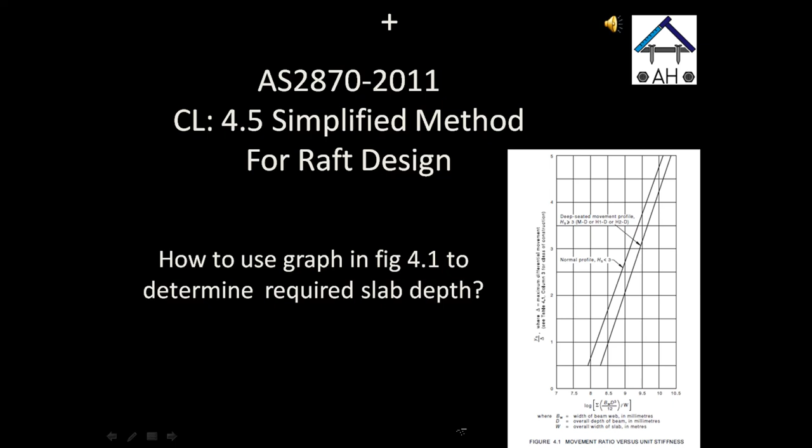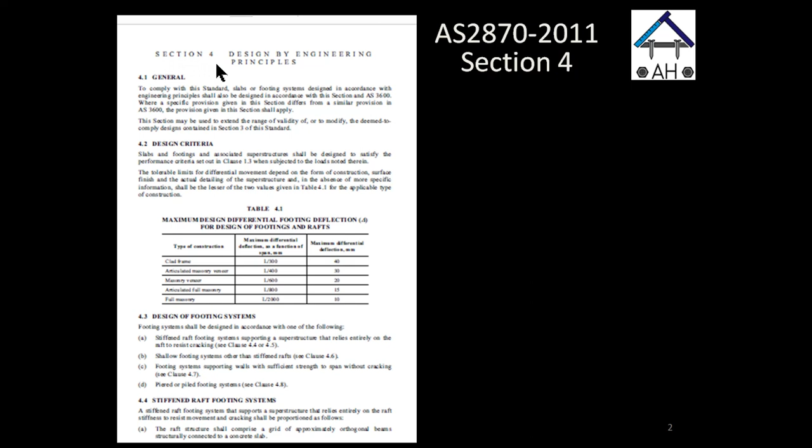The simplified method is located under section 4 of the standard, design by engineering principles. This section primarily allows the designer to work outside of the scope and modify the deemed to comply designs contained in section 3. So the designer can go out and modify the rib spacings or beam spacings, but as long as it takes the same shape of slabs which are covered in the deemed to comply designs.

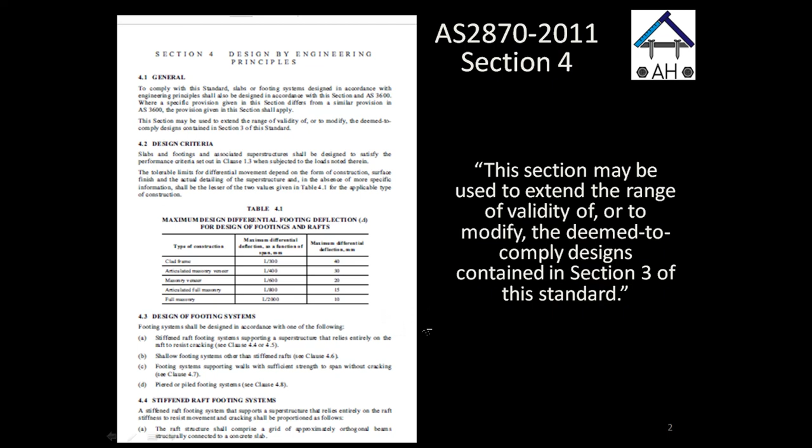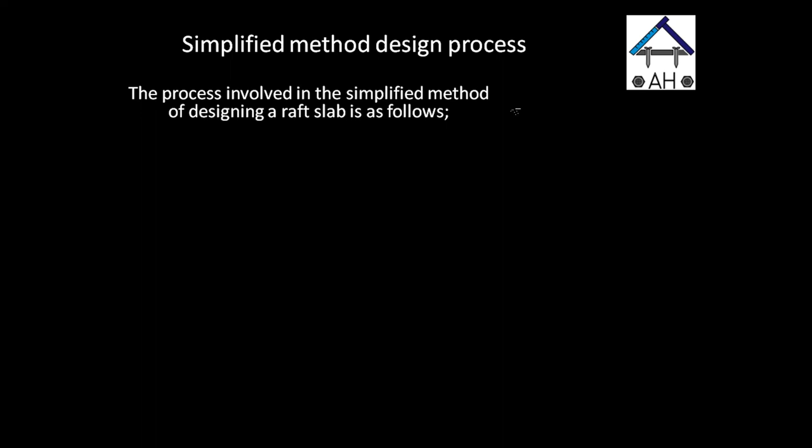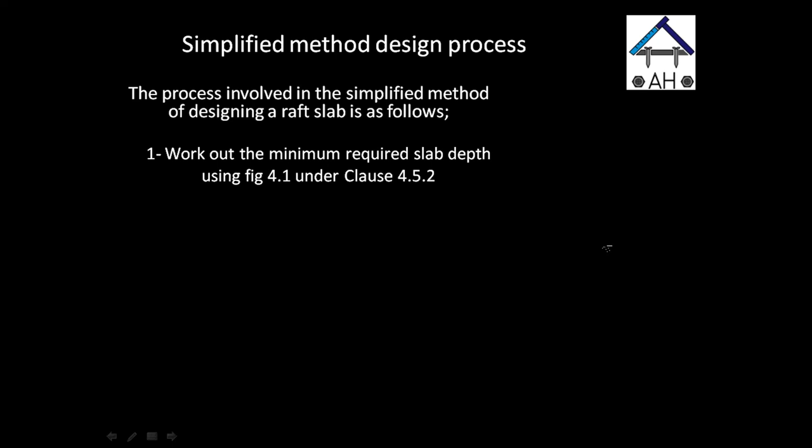The process involved in the simplified method is as follows. 1. Work out the minimum required slab depth using figure 4.1, which we will thoroughly cover in this video with a worked example. 2. Ensure that all design parameters are within the range of the table below, which is again outlined in clause 4.5.1.

The table has a series of design parameters, as you can see in the first column, which needs to be carefully checked against the range shown in the second column of the table. So here, for example, we have in the first column the YS value, which is the characteristic surface movement. Then in the second column are the limiting values that we could use.

Generally, you can obtain the YS value from the soil report or through a geotechnical engineer. And here we could clearly see that the limiting values for HS, the depth of suction: if HS is greater than 3, then you can use 10 millimeters to 70 millimeters. And for HS less than or equal to 3, we can use 10 millimeters to 100 millimeters.

And there are many other parameters, such as differential deflections, the slab span. There's also beam spacings, whether it is a rib for a waffle slab or stiffened beams for stiffened raft slabs.

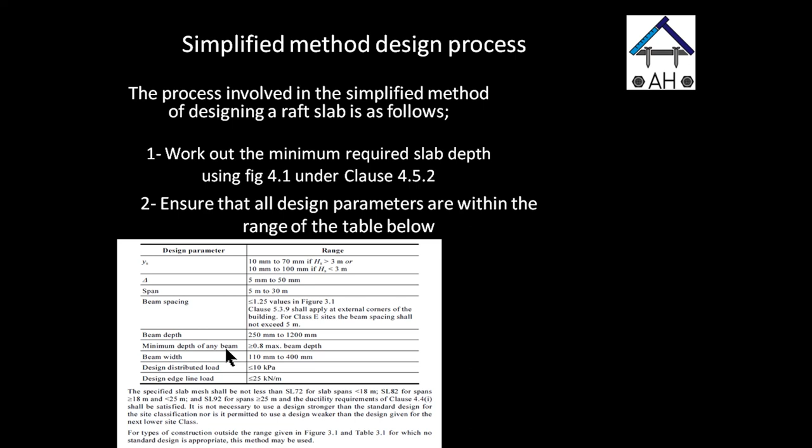Minimum depth of any beam must be greater than 0.8 maximum beam depth. Unfortunately, this requirement came across as very confusing for some engineers. So let's talk about it here, and I've given an example.

Let's take an example. Say we have a 385 deep waffle slab, and we want to provide a 500 millimeter deep edge beam to satisfy the overall stiffness requirement of the slab. So the depth of any beam in this case would be 385, and the maximum beam depth would then be 500 millimeters, which is what we are proposing.

Therefore, 0.8 of 500, which is 400, is greater than 385 millimeters, and therefore does not conform with the table range requirements. The simple way of looking at it is saying, okay, the maximum beam depth that we could have in this case would just be 385 multiplied by 1.2, and that'll give you about 462, rounded off to 460.

This is just another way of saying that 385 is then greater than 0.8 multiplied by 460, which then conforms with the table range. In saying this, however, we then need to take away that value and recalculate the requirements of stiffness of the entire slab based on a 460 deep edge beam, and check if it is satisfactory or not.

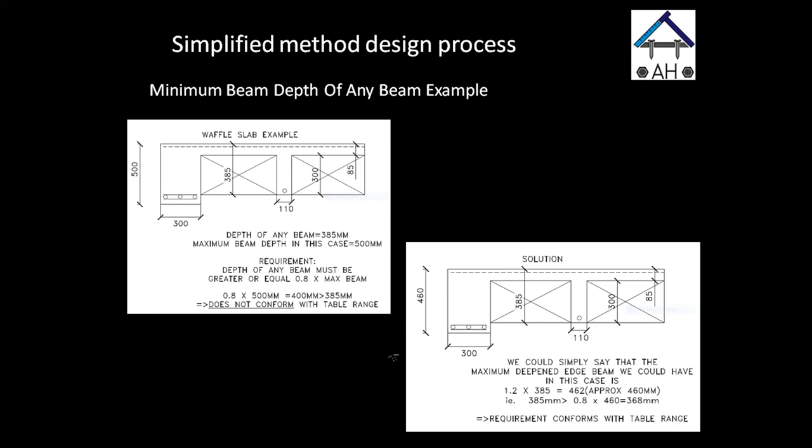Generally speaking, the slab as much as possible needs to be in a uniform and symmetrical shape to safely distribute the internal forces across the stiffening beams. Internal forces here refers to shear, moment, torsion, axial compression, and tension.

This is why the simplified method does not allow a great variation between beam depths. It is also important to note that most of the slabs which were previously tested to derive figure 4.1 were standard stiffened raft slabs with a reasonable uniform shape. And this was performed many years ago.

A waffle slab, generally speaking, is probably able to redistribute moment and shears through plastic hinges a little better than a stiffened raft slab due to the numerous amount of joined ribs, as we are creating more nodal points between the ribs. But I guess this is a completely different discussion, which we will maybe leave for another time.

With the rest of the table, we then have the beam width, which is between 110 to 400 millimeters, design distributed loads, which is less or equal to 10 kPa. Remember, this is to include the slab weight as well. Design edge line load, which is less or equal to 25 kilonewtons per meter, also including the slab weight. Finally, we have the minimum slab mesh requirements for varying slab lengths.

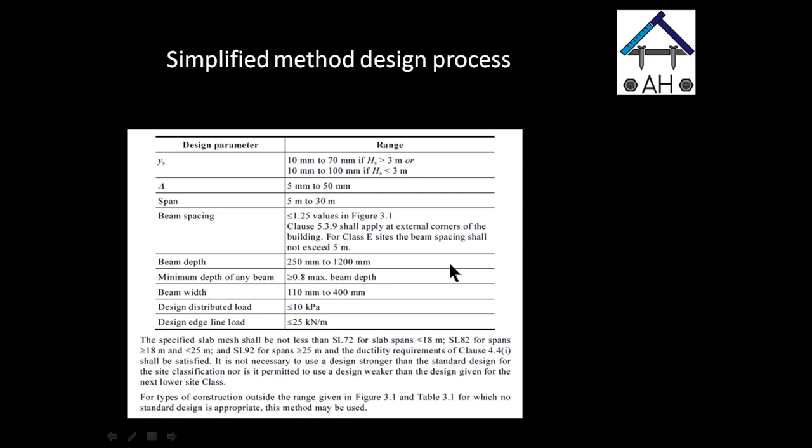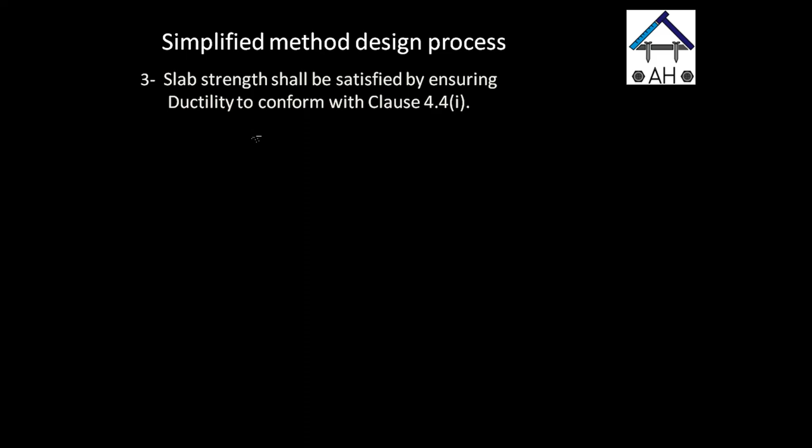The third step in the process is: slab strength shall be satisfied by ensuring ductility to conform with clause 4.4i, as shown below.

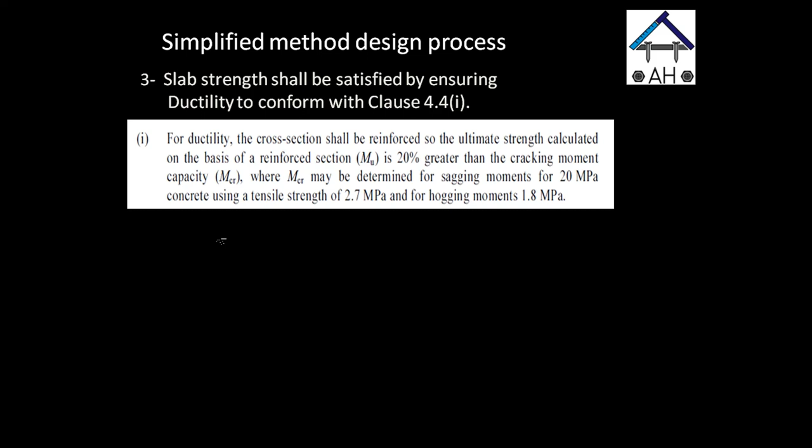With this clause, we need to make sure that the ultimate moment capacity in hogging and sagging of the section is greater than 1.2 times the cracking moment, where Mu is the ultimate moment capacity of the section in hogging and sagging. We need to check this separately for both modes of action, where Z is the section modulus in hogging and sagging, and Z is I, the uncracked second moment of area, divided by Y, the distance between the centroid of the section and the extreme fiber in tension, to the extreme face of the concrete in tension. FCT is the concrete tensile strength, which is 1.8 MPa in hogging and 2.7 MPa in sagging. These values were derived based on the compressive strength of the concrete being approximately 20 MPa.

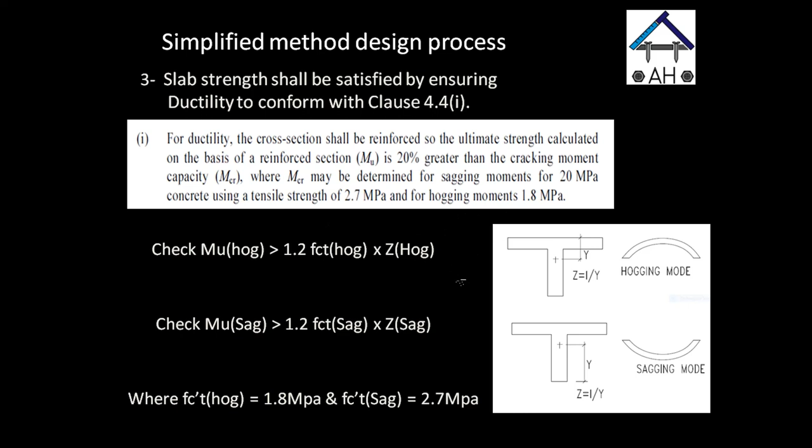Just before we go through the process of using figure 4.1 to determine the minimum required depth of the slab, there are a couple of things to note.

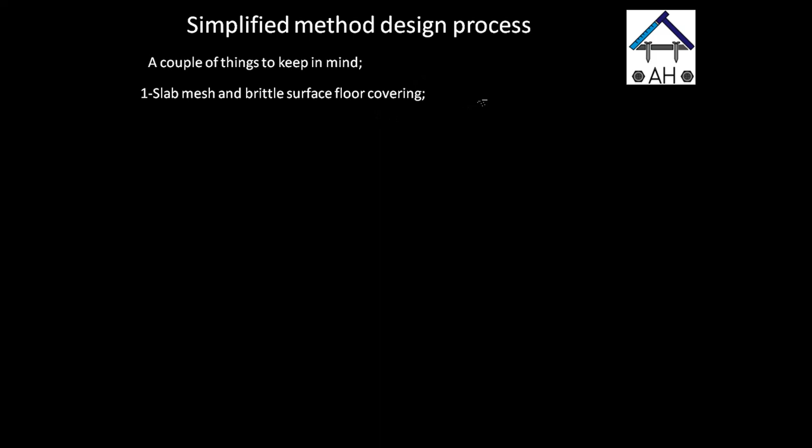One, the slab mesh requirement stated below is only minimum, and it is important to check areas of the slab where brittle floor coverings are used, such as floor tiles. So if you have more than 16 meters squared of brittle floor coverings, you may need to refer to clause 5.3.7, shrinkage and cracking control, for more information. You might have to use a higher grade mesh like SL92, or provide additional control joints in the brittle surface. I recommend you go back to this clause and have a read of it.

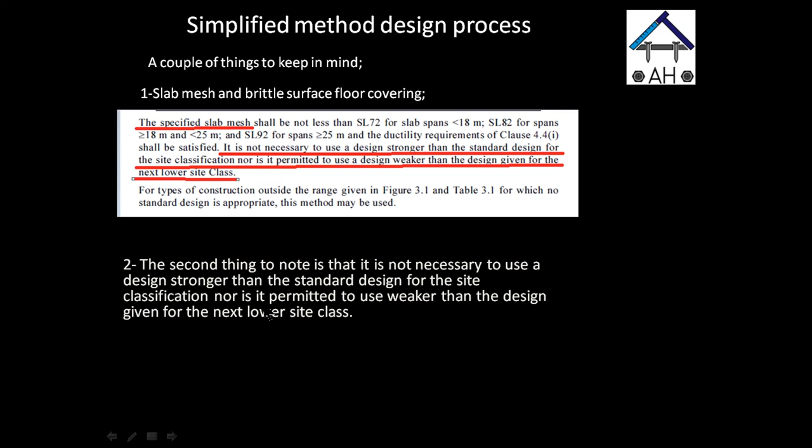Number two, the second thing to note is that it is not necessary to use a design stronger than the standard design for the site classification, nor is it permitted to use a design weaker than the design given for the next lower site class.

Let's say for example we have an H2 site with a YS of 70 millimeters and a differential deflection of 30 millimeters, and the slab depth determined from figure 4.1 happens to be 400 millimeters. Then it is not necessary to use a design stronger than the standard design. So we could still probably get away with using a 385 freeboard if we stick with the simplified method.

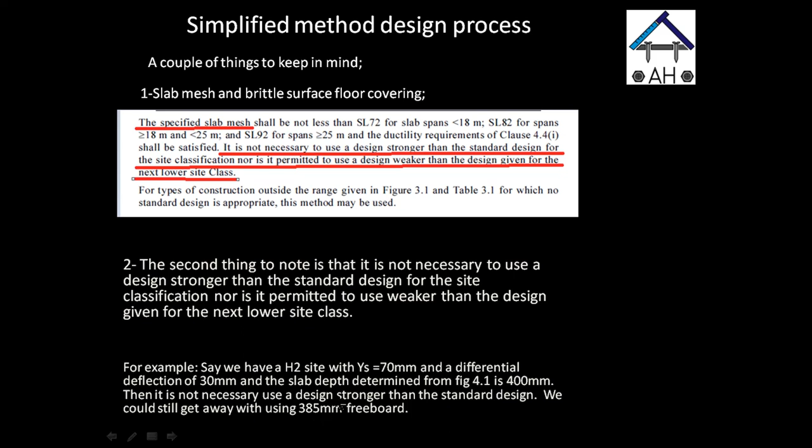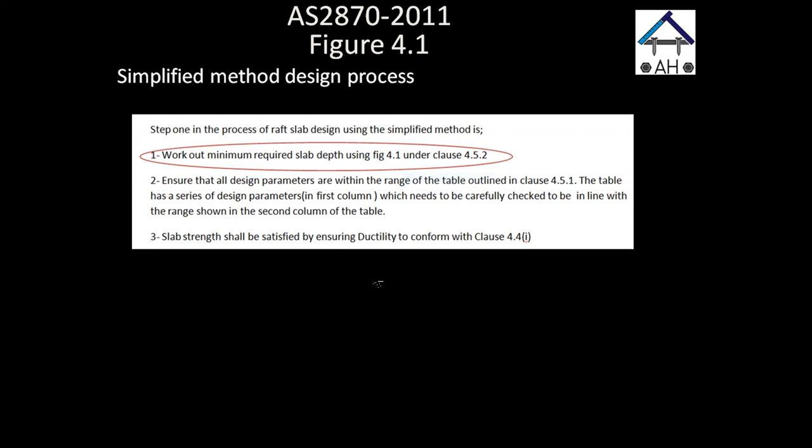Okay, finally, let's get straight into an example. Step 1 in the process of this raft slab design is to work out the minimum required depth using figure 4.1. So let us take an example here.

Say we have YS, the characteristic surface movement of 75 millimeters, which is an H2 classification, and you can obtain that from the soil report. We're doing a single story home. The depth of suction is 2.3 meters, and we will take this home to be located in Epping, a suburb in Victoria, located in the north. We will talk a bit more about the depth of suction and how we derive that. The slab type is a waffle slab, about 19.69 meters by 11.29 meters. The wall construction material we will take as lightweight cladding.

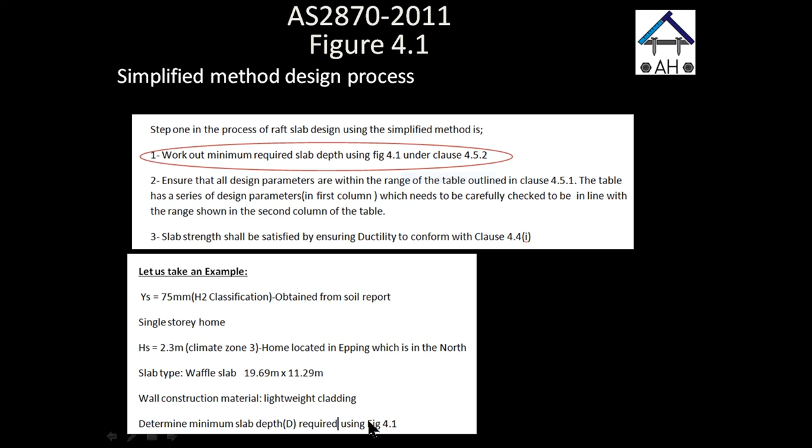The aim of this exercise is to determine the slab depth D, using figure 4.1. So step 1, we need to count the number of beams or ribs running perpendicular to the short direction and perpendicular to the long direction.

We have 17 beams, that's including the edge beams. So we have 17 beams running perpendicular to the long direction and 10 beams perpendicular to the short direction. This includes all the beams, including the edge beams as well.

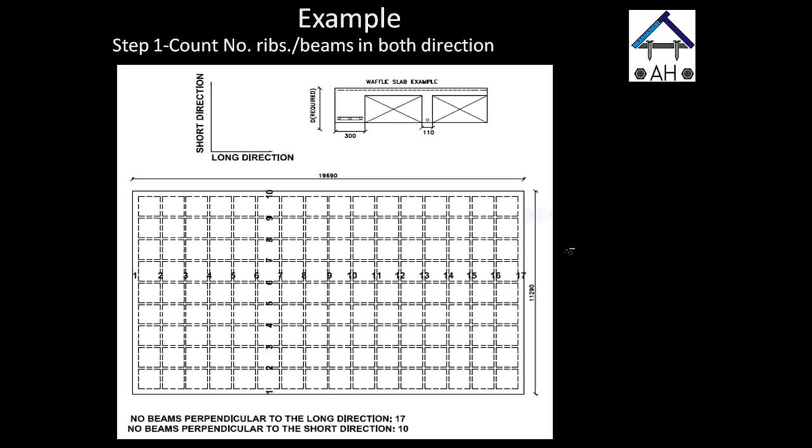Step 2 is to determine the average width of all the beams in both directions separately. In the long direction, we have 2 edge beams, which are 300 millimeter wide each, and we have 15 internal ribs, which are 110 millimeter wide. Therefore, the average beam width for the entire long direction would be 2 multiplied by 300 plus 15 multiplied by 110, divided by the total number of beams, which is 17, and that'll give you around 132.35 millimeters.

Similarly, we do it in the other direction, in the short direction. We have 2 edge beams, which are 300 millimeter wide, and we have 8 internal beams in between the edge beams, which are 110 wide. Therefore, the average beam width for the entire short direction would be 2 times 300 plus 8 multiplied by 110, divided by 10, and that'll give you 148 millimeters.

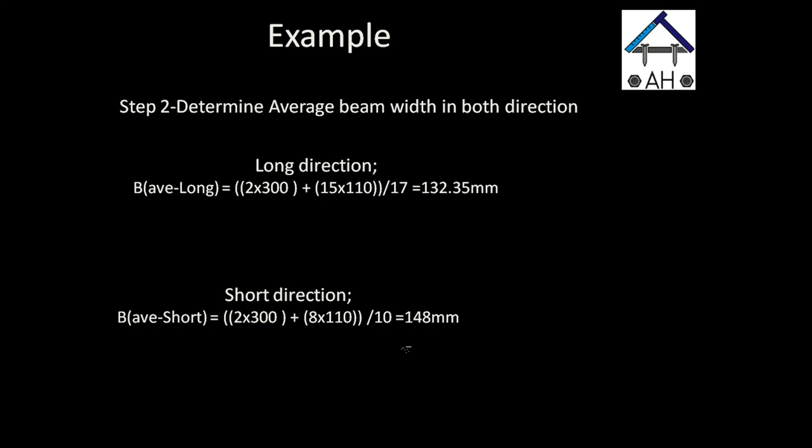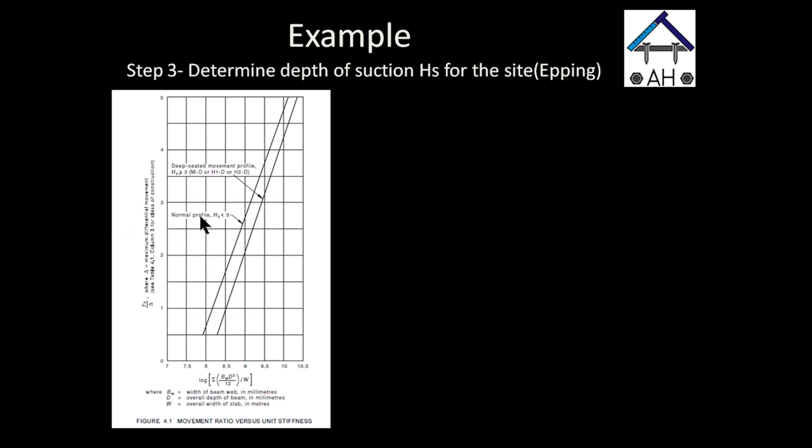Step 3. Confirm the value of the depth of suction for the chosen site. In this case, we have Epping, which is a suburb in Melbourne, located north of the CBD. In figure 4.1, there are 2 linear lines. One line represents the normal soil profile, where the depth of suction, HS, is less than 3 meters. The other line represents the deep-seated movement profile, where HS is greater or equal to 3 meters.

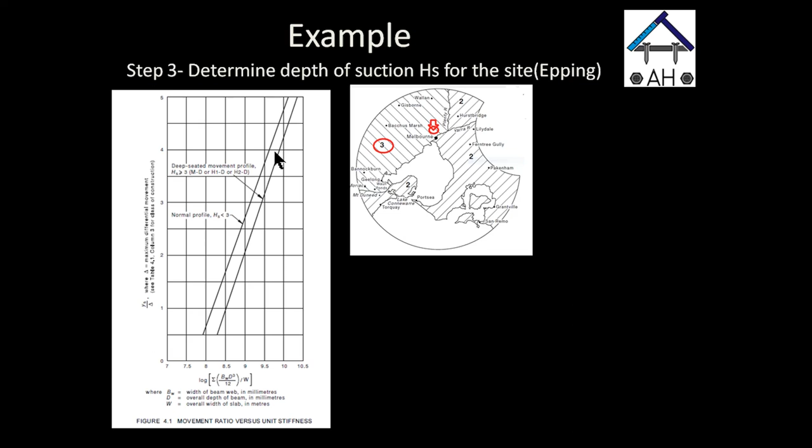So how do we know what depth of suction to use in Epping? We need to look up the Melbourne climate zone maps in figure D1 in the standard. I've marked an approximate location in red where Epping may be, and it is located north of Melbourne CBD. As you can see here, it is climate zone 3.

Then we go to table 2.5 and read out the corresponding depth of suction for that site, which in this case HS is 2.3. So for this example, we need to use the first line on the graph to determine the slab depth, because 2.3 is less than 3.

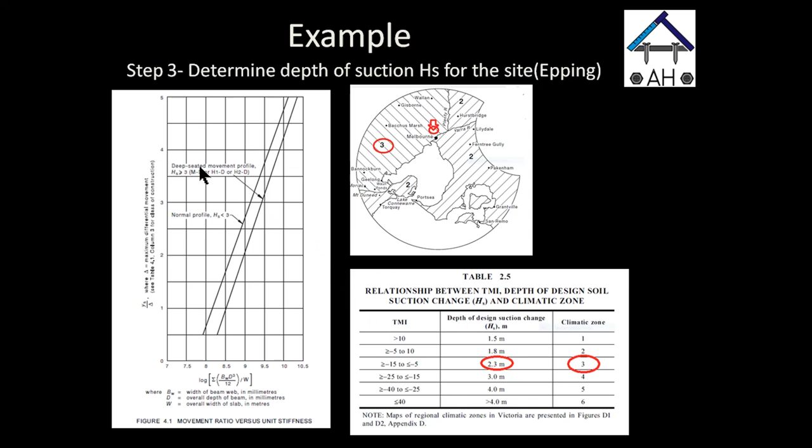Step 4, determine the differential deflection delta from the construction materials given to us in the problem for both directions. We do that separately as well. Then we need to determine the movement ratio, which is YS divided by delta. That movement ratio is the value on the y-axis of the graph on figure 4.1.

We were given a waffle slab to support a lightweight cladding frame. We then go to table 4.1 and look up the corresponding differential deflection values. We need to do this for both directions. Many times though, engineers tend to forget to check it for both directions.

It is important to assess the stiffness requirements of the slab in both directions, and then adopt the worst case slab depth requirement to cater for that differential deflection. So in this case, we need to select the lesser of the two values in the column of tables 4.1. Longer direction, we can start off with that.

The length of the beams perpendicular to the longer direction is 11.29 meters, which is basically 11,290 millimeters. We need to take the total length from one end to the other. So if we do have a slab with a rebate, we can take the total length between the rebates, but then ignore that section of the rebate in our calculation. But it has to be the total length of the entire slab.

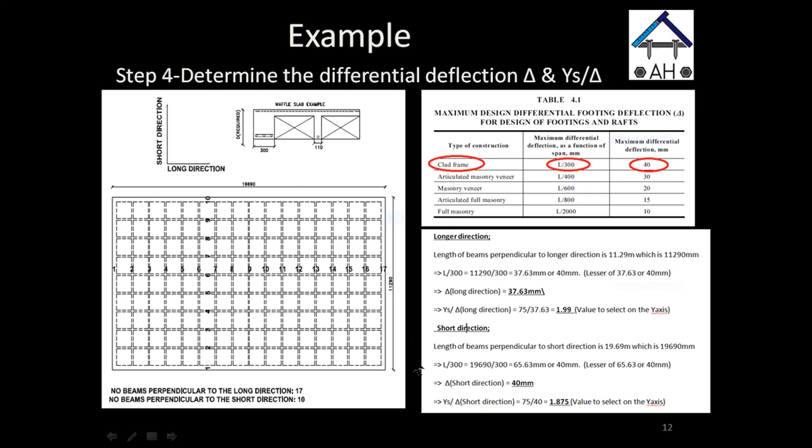Now we all agree that HS is 2.3, which we will use the first line. Number of beams is 17 in total. Beam length 11,290 millimeters. The width of the slab is 19.69, so the width of the slab is perpendicular to the beam length, and the movement ratio is 1.99.

Therefore, what we say is 8.65 is equal to log BW, or B, which is average width, times D cubed divided by 12 divided by the total width of the slab. Upon substitution, 8.65 is equal to log of 17 multiplied by 132.35 D cubed divided by 12 divided by 19.69. We've got to remember though, the units of the beam web is in millimeters, and the units of the entire width of the slab must be in meters.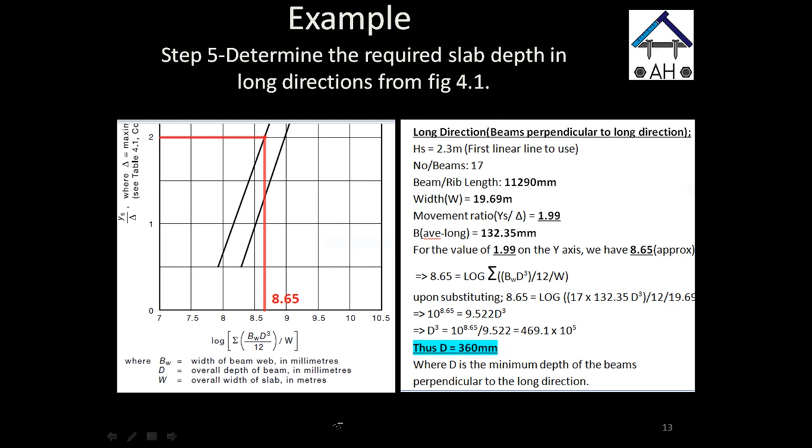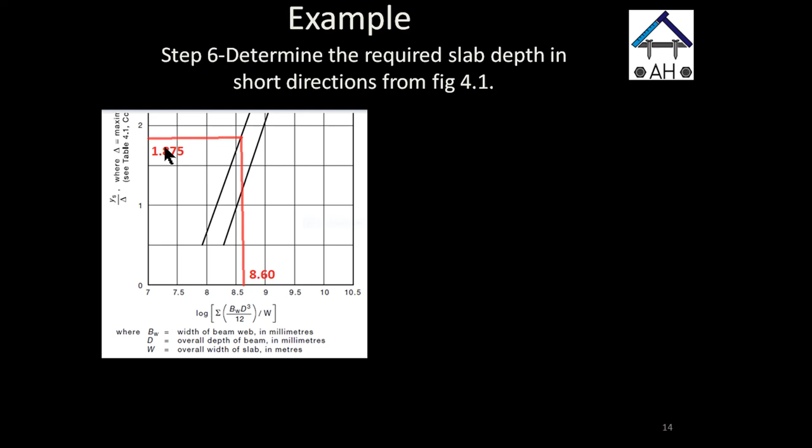Step 6, we're almost there. Determine the required slab depth in the short direction. So for beams perpendicular to the short direction, we have the following worked out parameters. HS is 2.3, number of beams in this case is 10, the beam ribs length is 19690 millimeters, the width, remember it's in meters, so that's 11.29 meters, the movement ratio 1.875, and the average width of the ribs is 148 millimeters.

For the value of 1.87 on the y-axis, we have approximately 8.6 on the x-axis. Like before, 8.6 is equal to log BD cubed over 12 over W. And then we say 10 to the power 8.6 is equal to the right hand side after working everything out, which is 9.522 D cubed. Therefore, D in this case would be 331 millimeters. Now, this minimum depth is for beams perpendicular to the short direction.

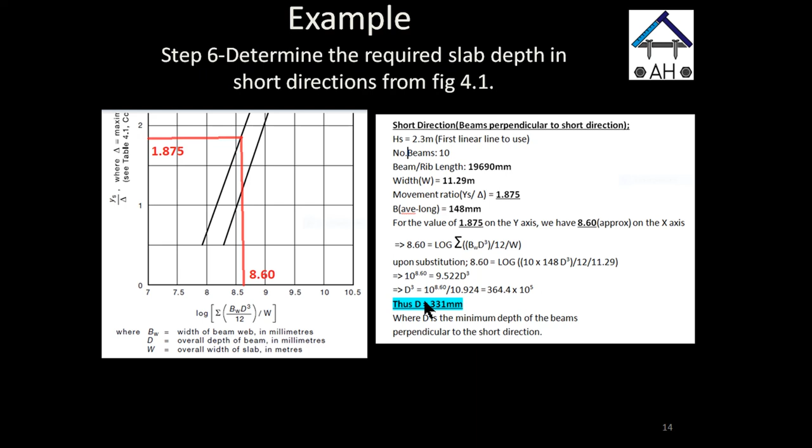Step 7 is selection of the appropriate slab depth for the design. In general, we will look at the depth that we worked out, 331 and 360, and then say, okay, we will do the worst case scenario and choose 360. So from previous calculation, we determined that we have D perpendicular 360 in the long direction, and slab depth required for beams perpendicular in the short direction.

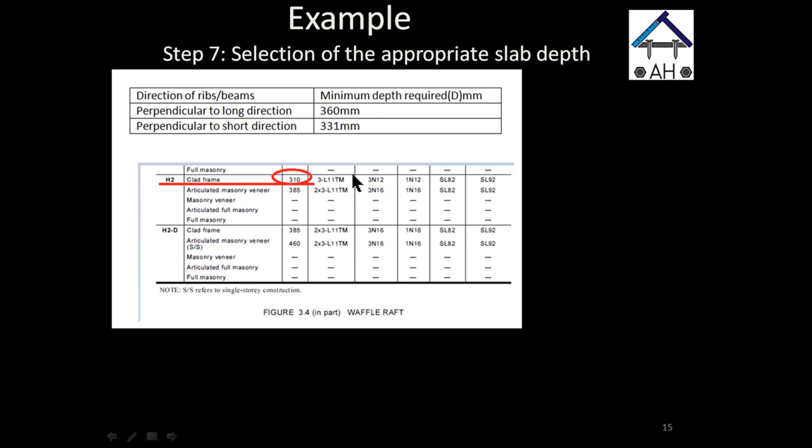This is 331. But you've got to remember that this is a single-story home supported on a clad frame, and the site classification is H2. The minimum slab depth, as per section 3, deemed to satisfy from figure 3.4, is 310 millimeters. Therefore, it is not necessary to use a design stronger than the standard design for the site classification. So we may, in this case, adopt 310 millimeter slab depth to conform with section 3, figure 3.4.

So I think we're lucky in this case, because it was supporting a clad frame, we could use 310. If it was an articulated masonry veneer, then the minimum depth here would be 385 - we couldn't have used 360, we would have had to use a 385 millimeter slab depth. But I think we were lucky in this case that the deemed to satisfy section has saved us, and probably saved the client some money as well.

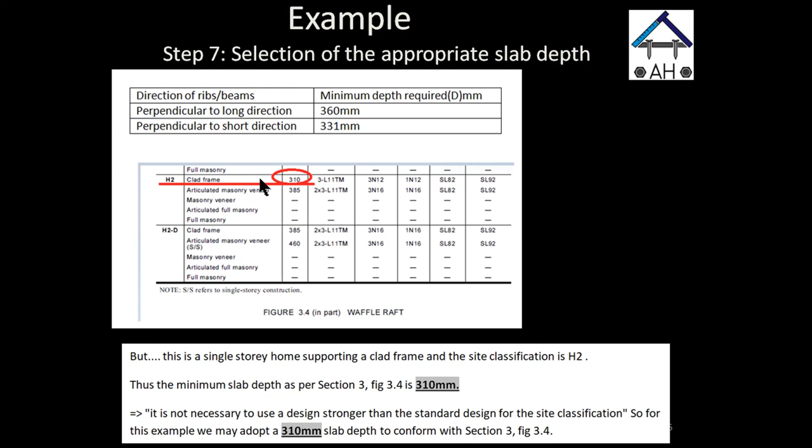Okay, so far in this video we mainly covered the first steps in the process of raft design using the simplified method. I hope you enjoyed it. In future videos we will cover the other two steps, which are pretty tedious. The other two steps are to ensure all design parameters are within the range outlined in the table under clause 4.5.1, and the third step is to check the slab strength by satisfaction of ductility to conform with clause 4.4.

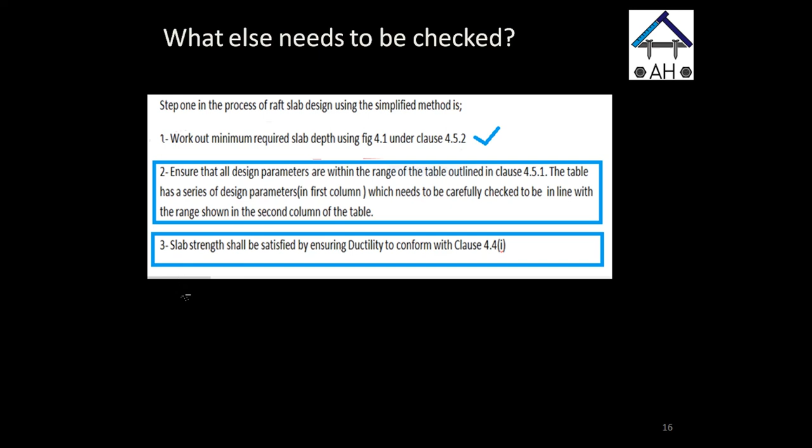Other common questions we could cover in later presentations - these questions from fellow engineers whom I've worked with along the years, and some of these questions I'll share with you. We can cover that later on.

Can I use the simplified design method for the following situations? One, P-class sites. Second question, sites with existing trees and/or removal of trees - that's interesting. Three, sites with removal of structures. Four, sites with level 1 compaction. Can I use graph 4.1 if I have that situation?

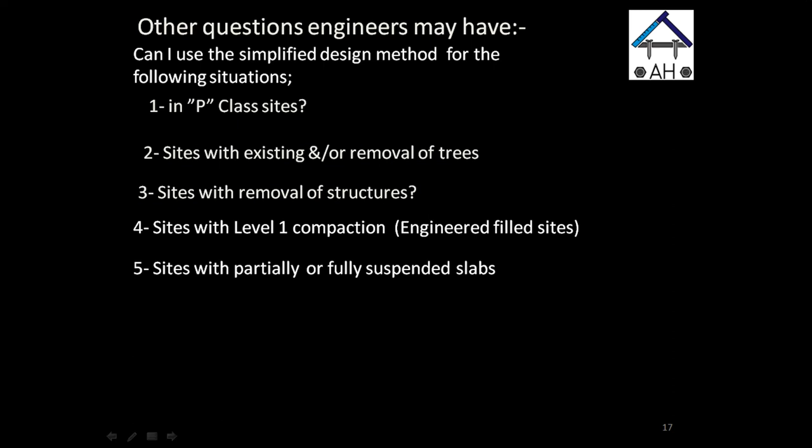Five, sites with partially or fully suspended slabs. Now I've seen engineers use it all the time with this situation - is it acceptable or not? Number six, sites which have a YS value more than 100 millimeters, but the slab is fully suspended with piers or piles, and the pier depth is well below the cracking zone. Where does it lead us here? Am I allowed to use it? Can I reduce the YS value to consider for a deeper pier depth?

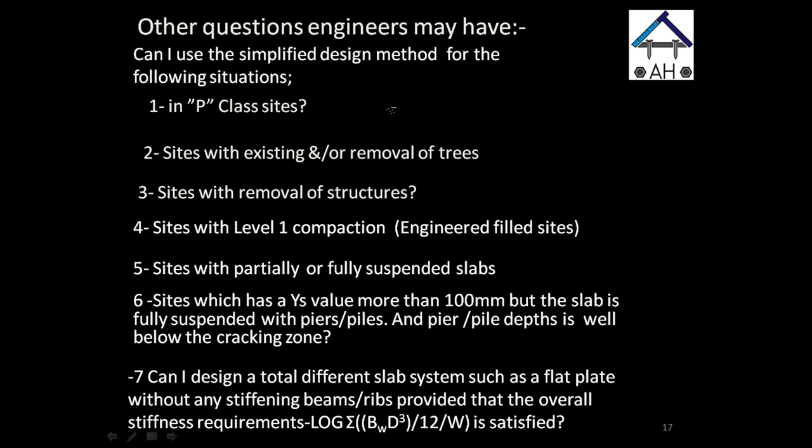Interesting. Seven, can I design a totally different slab system such as a flat plate without stiffening beams or ribs? Previously we spoke about redistribution of moments and how having ribs helps with redistribution of moments. Can engineers design a flat plate using this system? Is it the same, provided that the stiffness is the same? Well, this is probably something we can talk about for a very long time, so we will save this for another video.

Now the last question, that many engineers including myself have, is what happens to soil suction HS and thus soil movements with climate change? And then it makes us think, okay, how long is figure 4.1 valid for? As we're aware that the TMI values, especially for Melbourne and Adelaide, are decreasing by time. There is clear evidence of increase in seasonal temperature and general rainfall decline.

The CSIRO in 2007 made some predictions of climate change for Australia. For example, in southeastern and southwestern Australia, they're expecting that in 2030 and 2070 the temperature will increase by about 1 degree and 3 degrees respectively. And not only that, but the winter and spring rainfall is predicted to decrease significantly.

So based on this prediction, Peter Mitchell, in many research papers, expected a drop of about 30% in the TMI for Melbourne between 2012 and 2030. And for Adelaide, he was expecting a drop of 40% in TMI. So where does this put engineers in terms of design liabilities in the future? This graph in figure 4.1, we have to remember, was developed at a particular time in the 60s and 70s, where climate change was a lot different than today. So the question here probably refers back to the Code Committee to give us some sort of indication of where these predictions are at, and whether this would affect the site classification.

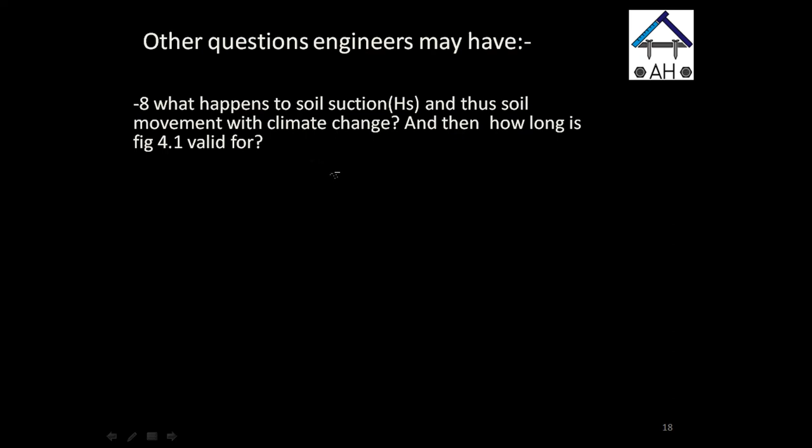A great drop in the TMI means that the predicted movement, which is the YS value, would dramatically increase. Peter Mitchell gave some predictions of an increase in the YS value by time. For Melbourne, for example, he said that a YS value of 35 millimeters in 2012 would end up being 45 millimeters by 2030 and 60 millimeters by 2070. So here are some interesting questions you may want to think about till we meet again next time. Thank you all for listening, and I hope this has helped.